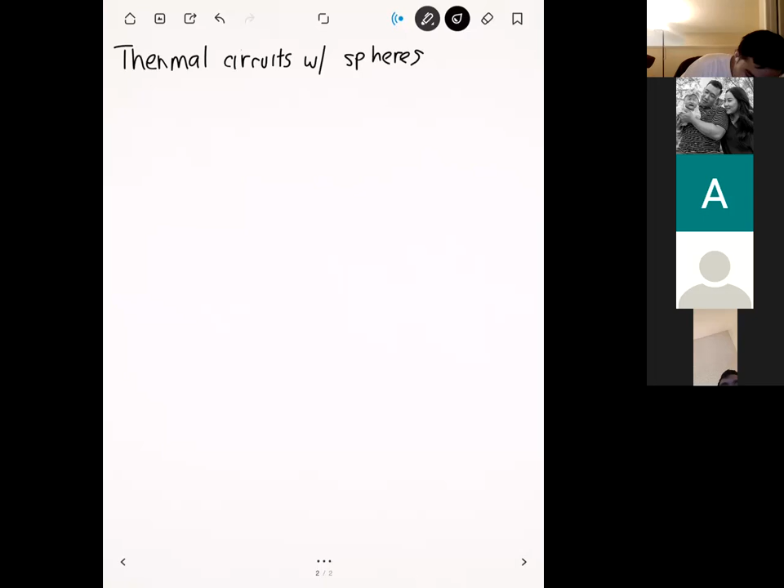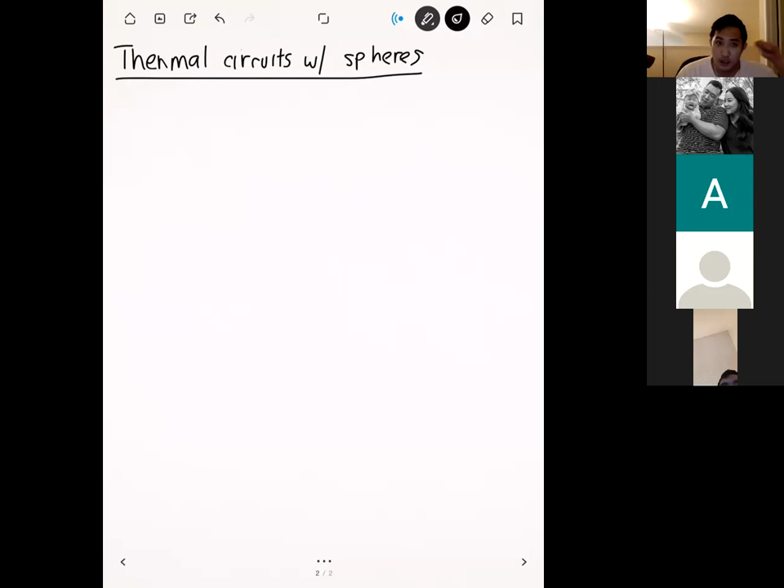All right, so there's one more thing I wanted to cover with spherical heat transfer before we move on, which is thermal circuits with spherical geometries. So I believe last time we derived the expression for the thermal resistance of a sphere, and that was based on one of our solutions to the heat equation. That resistance was given by the following: R sphere is equal to 1 over the inner radius minus 1 over the outer radius, divided by 4 pi k.

And so what you have here is another formula for thermal resistance that you can use in basically exactly the same way. Even though it's a spherical geometry, you can set up the thermal circuit just like you did in Cartesian coordinates and just like you did in cylindrical. It's just that now whenever you have conduction, you're going to use this equation here. And so just as an example, let's do a 3-layered sphere.

So let's say that we have a sphere that looks like this, right? And so let's say that all the way up to here, our radius is R1, okay? Up to the second notch, our radius is going to be R2. The third notch is going to have a radius of R3. And the fourth notch is going to have a radius of R4, okay? And then inside these layers, they all have a unique thermal conductivity. Okay.

Right. And so let's say that we have Ka for the first layer, Kb for the second, Kc for the third. Okay. And then on the outside of the sphere, let's say that we have heat transfer due to convection. Right. And so that convective heat transfer is going to have its coefficient H and its temperature T infinity. Okay. One more thing that we need before we draw the circuit is we need to know the temperature on this interior surface here. Let's say that we have this temperature. We'll give it a value of Ti. Okay.

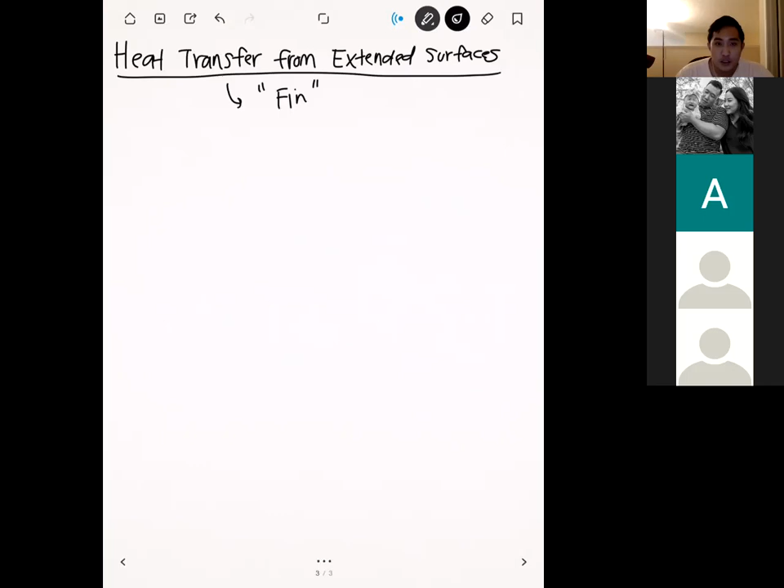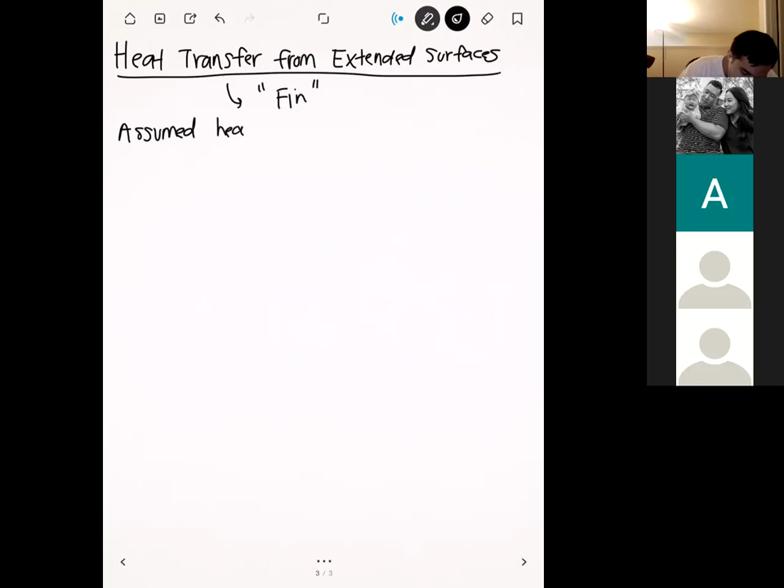The reason for that is up to this point, we've assumed that the heat transfer was purely one-dimensional. This was an extremely important assumption because it allowed us to really simplify the heat equation. As an example, we've looked at cases like heat transfer through a layered wall, and maybe we have convection on the outside here. And so the heat transfer we assumed is all in this direction.

Even to the fluid right here, we assume that the heat is going to leave the surface and go out to the fluid in that direction. So everything is in just one direction. With extended surfaces, we're going to have something different. We're actually going to be in a pseudo 2D case. It's not going to be general 2D heat conduction, but we are going to have heat transfer in different directions here. So what we have now is something like this.

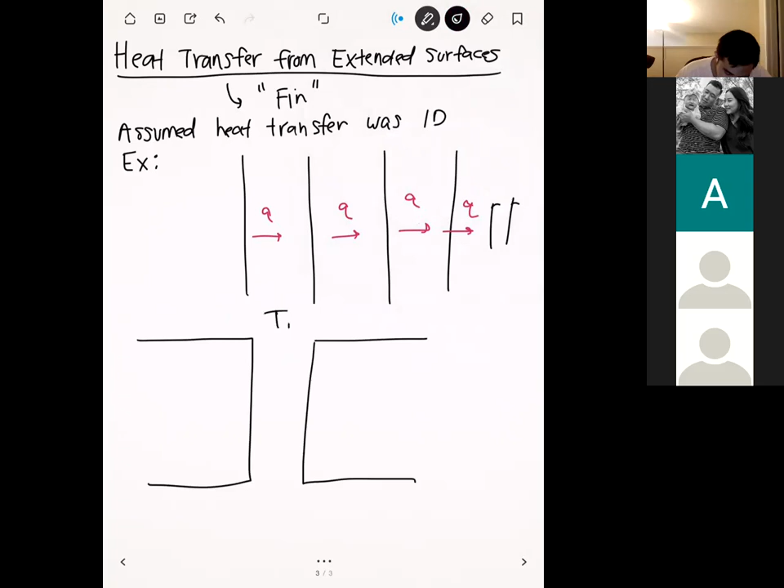Let's say that we have an object like this, and our top surface here is held at T1 and our bottom surface is held at T2. If T1 is greater than T2, we know that we're going to have conduction heat transfer going this way. Heat is just naturally going to flow from high temperature to low temperature.

But the wrinkle that we're going to throw in here is that now the convection is going to be blowing across this surface, so we're going to have heat transfer by convection like that. If you look at how heat is going to leave this solid to the fluid, it's going to look something like this: because the fluid is touching the surface on its lateral side instead of at the end, our heat transfer due to convection is going to go left and right. And that's different than when the heat transfer is going down the length.

So now what we have here is a pseudo 2D situation where our convection is going one direction, but our conduction is going the other direction. The methods that we've developed up to this point won't apply here because we can't assume that all of it's in the same direction. So we're going to need a different equation, what's called the fin heat transfer equation, and then we'll discuss how to solve that. Any questions on this?

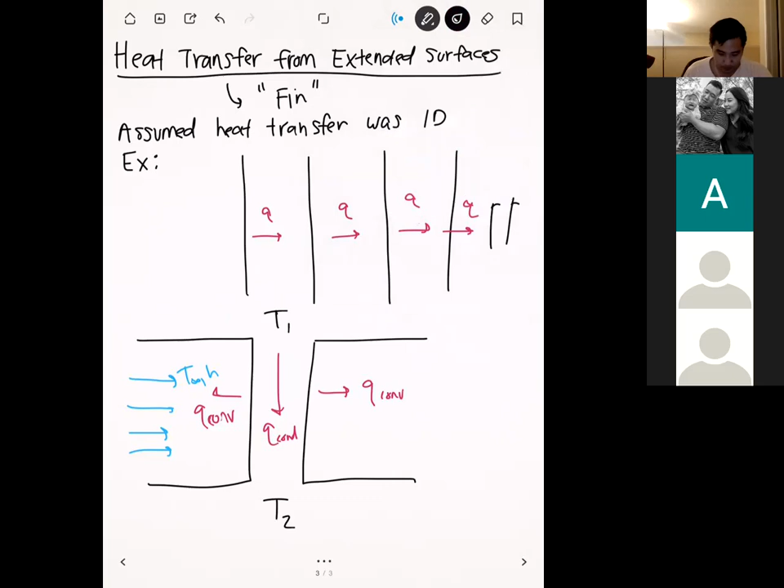Okay. All right. So before we do that, let's talk about just the general purpose of fins to begin with. And so usually, if you're designing your engineering device, the reason why you would want to add fins to a surface is you want to enhance heat transfer. Okay.

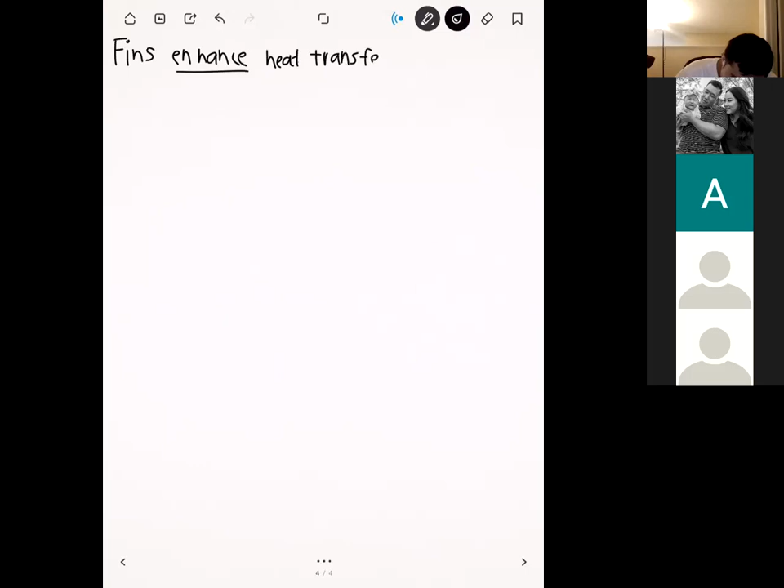Because in most of these situations, you're going to have some kind of fluid. A lot of times it's air, right? So you just have air blowing over your device. And if you want to enhance heat transfer from your engineering device to the fluid, then you want to add some fins, okay? And the primary way that fins enhance heat transfer is that they simply increase the amount of surface area that is on your object, right?

All right, question in the chat, like the World War I Lewis machine gun. Yeah, actually, I think a lot of those early gun designs needed fins just because those things heated up like crazy. And so just to prevent them from burning the operator's hands or melting themselves, they had to put fins on them so that they could expel their heat a lot more efficiently. Okay.

Because in general, the more surface area that you have, the more places that convection can take place. Okay, and so just as a very simple example, let's consider a surface like this, and we have fluid that's blowing past it. Since we have fluid flowing past the surface, we're going to have convection heat transfer, and so heat's going to come out here to the fluid. And so that's fine. But then what if we have a surface that looks like this? Okay.

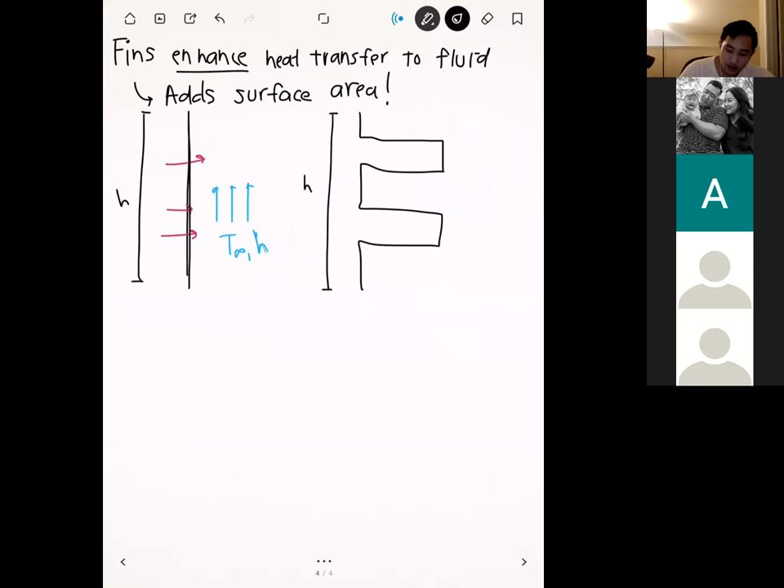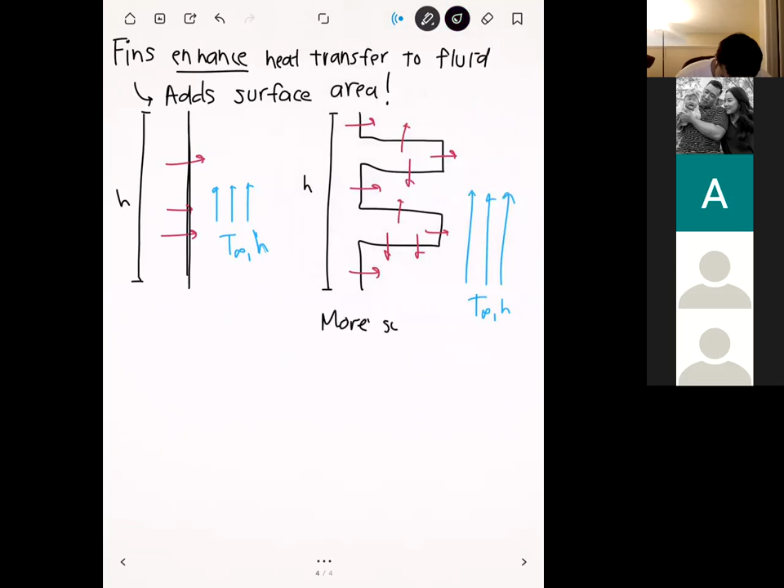Right. And so in terms of height, you can see that these occupy the same kind of vertical space, right? But the case on the right just has a lot more surface area. And so when you blow fluid past this, whether it be air or water or whatever, you're naturally going to have a lot more convective heat loss because you have much more surface area. So there's basically many more places for heat to escape the system due to convection. Okay.

And so this concept is actually used a lot. You'll see fins in a lot of computers too. In computers, you'll see these structures that just seem to come out. Usually they're made of metal, and they don't plug into anything. But what they're used for is to increase the surface area of whatever computer hardware or computer chip you're on, and that increased surface area will help cool it much more efficiently.

So you'll see fins that are used in engines as well, particularly on motorcycles. Fins are used to cool motorcycles pretty efficiently. Also in any kind of air conditioning or heaters as well, yeah.

Question. So I'm guessing there's a sweet spot for the distance between the fins. Yeah, so we'll talk about that. Probably not today, but probably next Wednesday we'll get to that. We'll talk about fin performance and different ways that you can optimize that. Yeah.

Okay. And so if you end up working in any kind of thermal engineering, odds are you're going to be working with fins to some degree. Because they're relatively very simple, but they're also very effective. So if you know how to analyze fins and how to design them, that's a big part of the thermal engineering for a lot of different devices.

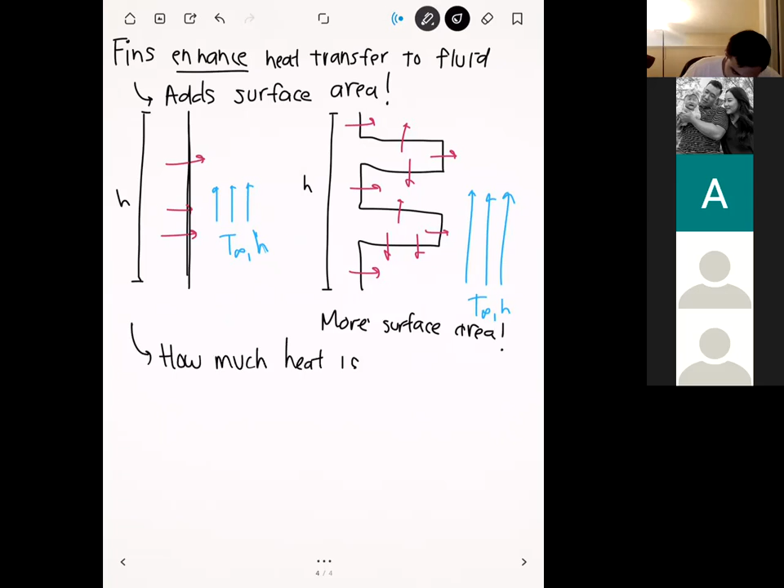Okay, and so what are we particularly interested in as engineers? What we're interested in is computing how much heat is transferred from a fin. Because if you can compute how much heat is lost from a fin, then you can learn how to design them and make them a big part of your engineering design. Okay. And so in order to compute the heat transfer, just like for everything up to this point, we're going to need to know the temperature distribution in the fin. Okay.

Because if we can solve for the temperature distribution, computing heat transfer is just a matter of either doing Fourier's law or Newton's law of cooling. Okay. And so what we're going to do next is look at the fin heat transfer equation and then look at the different terms. We're not going to derive it, because I think that would take a bit too long, but we can at least look at the equation and talk about each of the different terms in there. So before we do that, are there any questions on this?

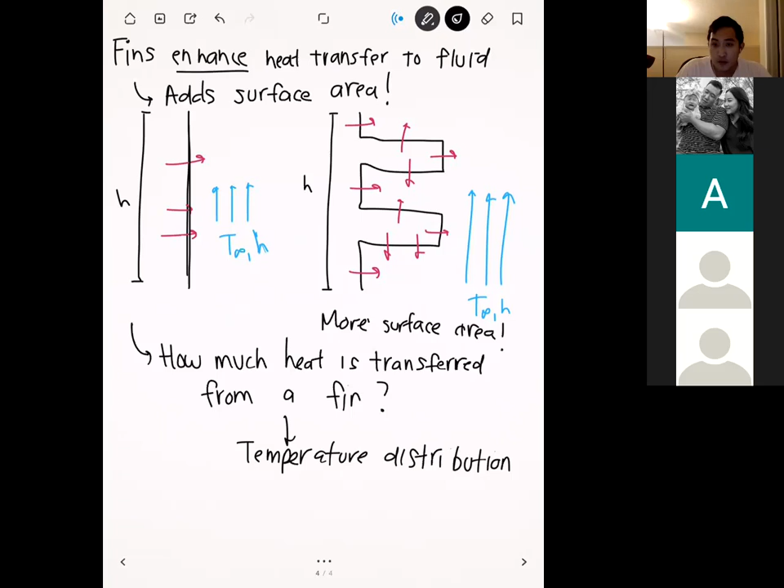Okay. So let's look at the fin heat transfer equation. I'm going to write out the full equation right now, but we'll simplify this significantly as we apply some assumptions. The first thing we have is d²T/dx². That should look familiar. That's a remnant of our regular heat equation, right? If you remember from our regular heat equation, we had the second derivative of T with respect to x.

The next thing that we have is this term: 1 over Ac times dAc/dx times dT/dx. And so Ac in this case is our cross-sectional area for the fin.

My phone's ringing. Someone's about to tell me my social security number has expired for the 11 millionth time. Okay.

And so that's the second term. And we have one more term here, which has to do with the outer surface area. So it looks something like this. And all that's going to be equal to 0. So we've introduced another new variable here, which is As. As here is going to be the outer surface area of the fin.

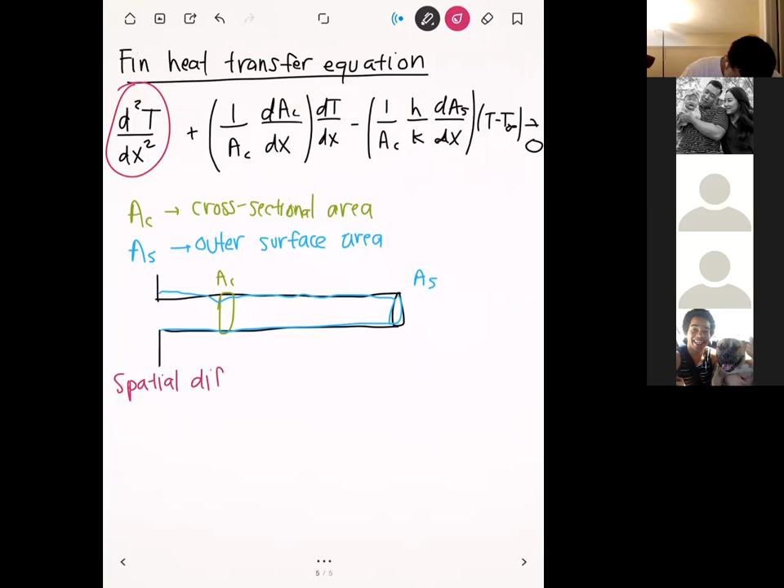Our fin is made of a solid material, and so because of that, we're going to have heat transfer through conduction all the way through the fin, and that's what that first term represents. It looks exactly the same as the term that we've had previously, because it represents the same thing: heat transfer through conduction through the solid part of the fin.

Now let's look at the second term right here. What the second term represents is a change in heat transfer in case the cross-sectional area of the fin changes.

The key term in this second term is dAc/dx. What that term mathematically represents is if the cross-sectional area is changing as we move along the fin. Say that you have a fin that tapers, that might look like this. In that case, the cross-sectional area is changing with respect to x, and this term accounts for that.

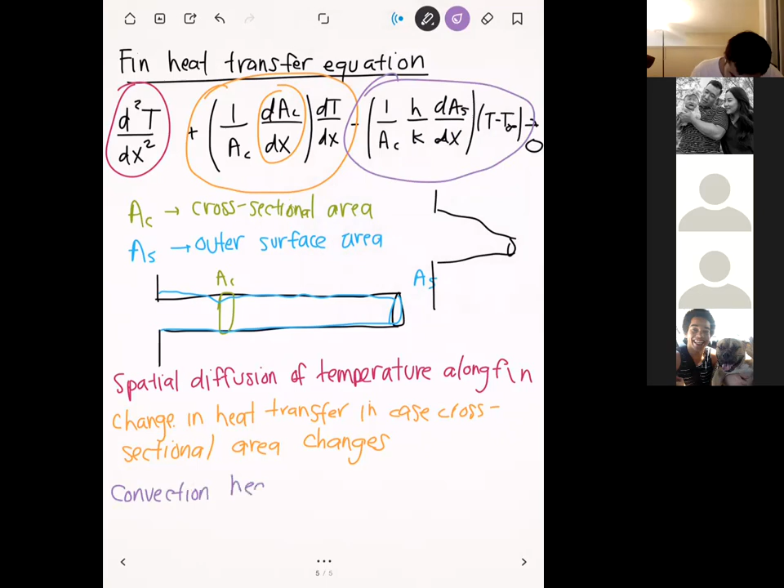Okay. And so, because this fin is a very slender object, our convection heat transfer is going to take place on the outside. Okay. And that's what that term represents. And so this one equation right here kind of accounts for those three modes of heat transfer.

So we have regular conduction through the fin. We have a correction factor in case the area is changing. And then we have a term that deals with the convection heat transfer off the lateral side. Okay. Any questions on this so far?

Okay. So let's go ahead and start applying some assumptions here to simplify this guy. The first assumption that we're going to make, which is fairly common, or it's not that bad of an assumption: we're going to assume that the cross-sectional area does not change. Okay. And so we're going to be dealing with a fin that looks exactly like the one I have pictured here. So it's basically the same cross-sectional area all throughout, right?

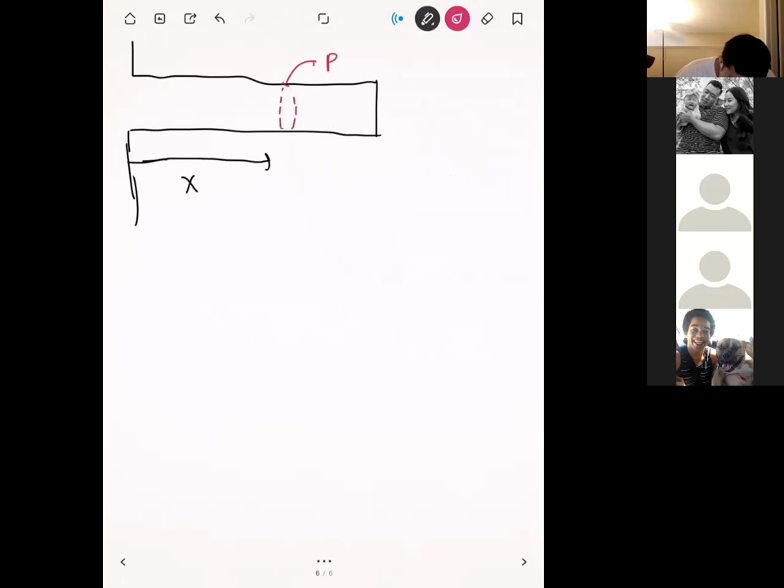And let's assume for a second that we're considering a length of the fin denoted by x. And so we can say that the distance from the base of the fin over to this section of the fin right here is x. One other thing that we're going to know here is the perimeter of the fin. Because if the cross-sectional area is constant, then the perimeter will also be constant as well. Okay.

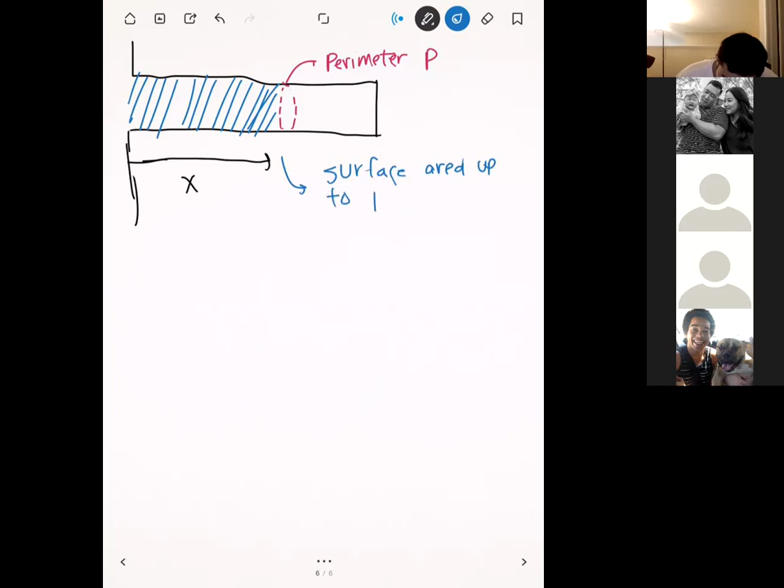And so let me do this. So up to this point x right here, let me go highlight the surface area that we've covered so far. And so if we only consider the section of fin that we've covered up to a distance x, we can compute the surface area up to that point. And so we're not considering the whole fin here. We're just considering the section between the base of the fin over to the location x.

We can then compute the surface area from this. It's just going to be simply the perimeter of the fin multiplied by whatever distance x. Right? So this is the part that's a little bit strange, because we have to think about how the surface area of the fin varies from different x locations on the fin. You can almost think of this function as the surface area that we've swept out as we travel from the base to the end of the fin. So if we're a distance of x from the base, we've swept out a surface area of p times x. Are there any questions on that?

What if you have like a hollow tube? Yeah, so if you have a hollow tube, that's going to affect mostly your cross-sectional area. If you have a hollow tube, then you're not going to have any convection heat transfer in the middle. You're still going to have convection heat transfer off the outside. It's just going to affect the cross-sectional area for how much conduction is going to go down that way.

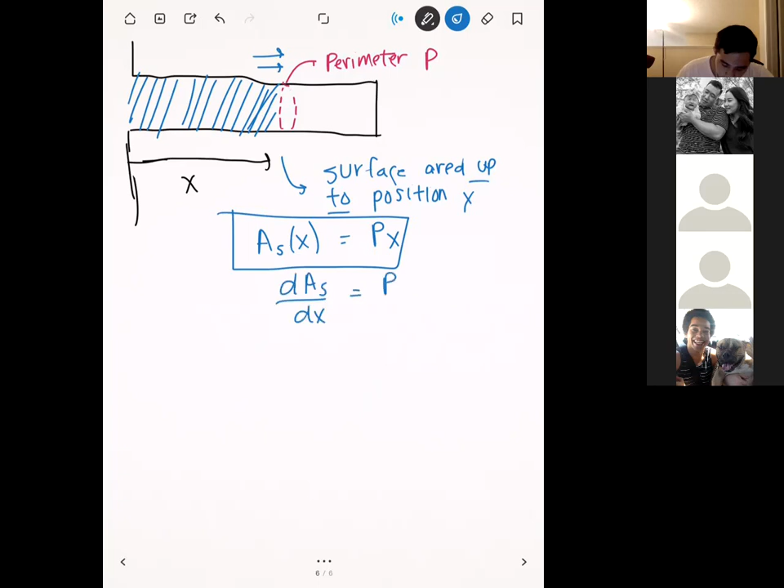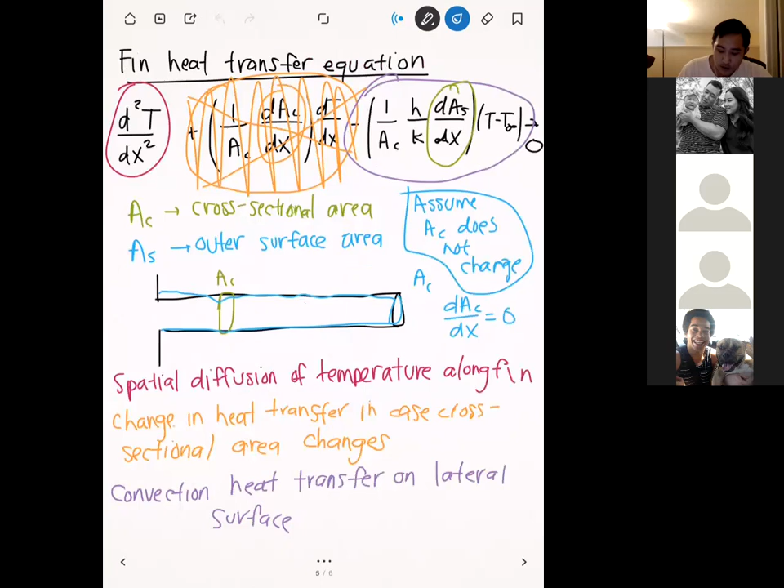And so dAs/dx is just going to be P, our perimeter. Right? And this is something that we can plug into our fin equation. Our fin equation, you can see that I've circled in green right here, we have dAs/dx. And so for the case when we have a constant cross-sectional area, then dAs/dx is also going to be a constant, which is just P.

Okay. And so if we put all these together, we can get a much more simplified version of the fin heat equation. We have our first term, which is d²T/dx². So that's fine. Then we have h times P. And so h, remember, is our convection heat transfer coefficient on the outside. P is the perimeter that we just talked about right here.

Then we have k, where k is the thermal conductivity of the fin material itself, times the cross-sectional area. Then we have the difference between the temperature of the fin and the surrounding fluid, and all that's going to be equal to 0. And so you can see here we have a much simpler equation to work with.

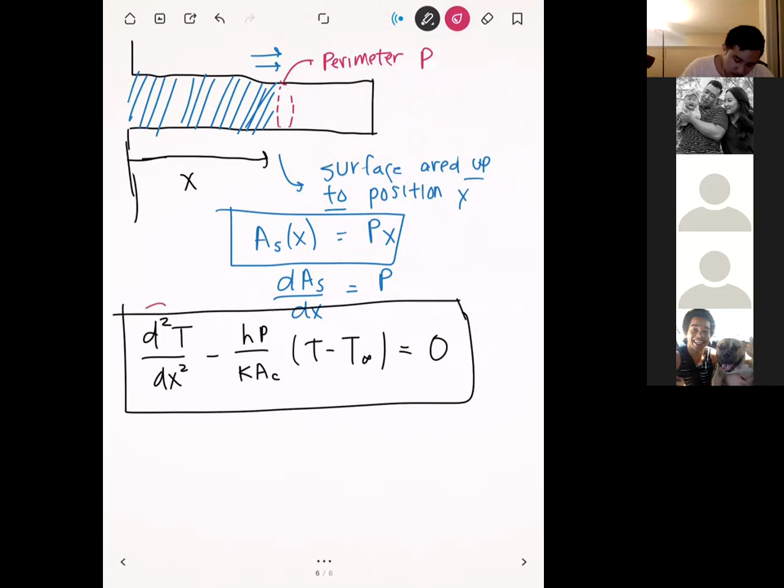Just to remind you what each of these terms represent, this first term right here is conduction heat transfer down the length of the fin. And then the second term right here is convection heat transfer off the outer surface of the fin.

Okay. And the nice thing about this equation is that these parameters here, which I'm going to circle in orange, are all constants. And so what we simply have here is a second order differential equation. It's a bit more complicated than our usual heat equation, but this is something that we can solve.

But there's actually one more thing that we can do to make this a little bit simpler, because right now this is what's known as a non-homogeneous differential equation. In other words, we have a term out here, this T infinity times hP over kAc, that's going to make solving this more difficult than it has to be. And so what's typically done for fins is we make a change of variables to simplify this a little bit more.

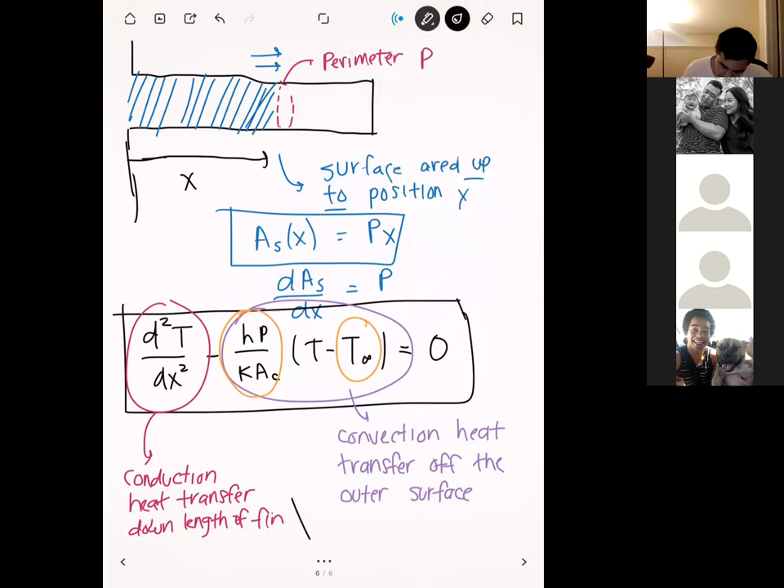It sounds scary, but it's one of the simplest changes of variables possible in science. So it's actually going to make our lives a lot easier once we do this. So before I do that, are there any questions on this page here?

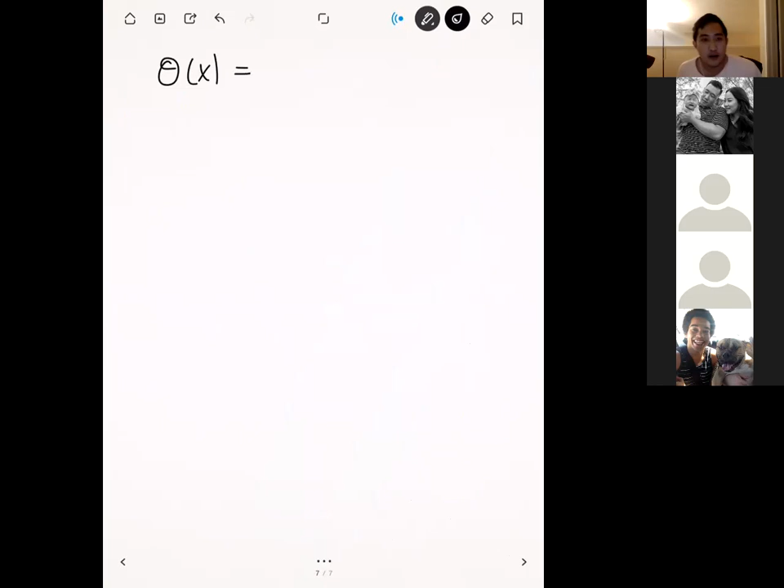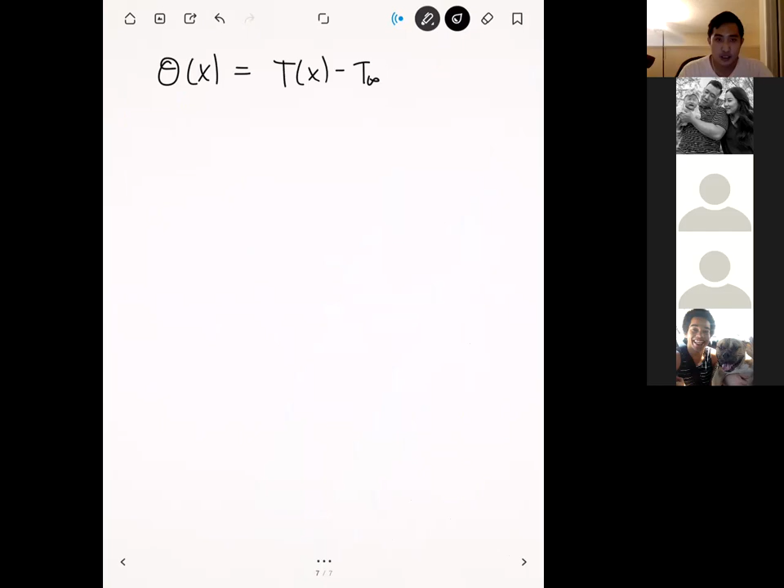Okay. So let's go ahead and define our change of variables. We're going to define a new variable called theta, and we're going to define theta like this. Theta is just going to be the difference T(x) minus T infinity, where T(x) is the temperature in the fin at a position x.

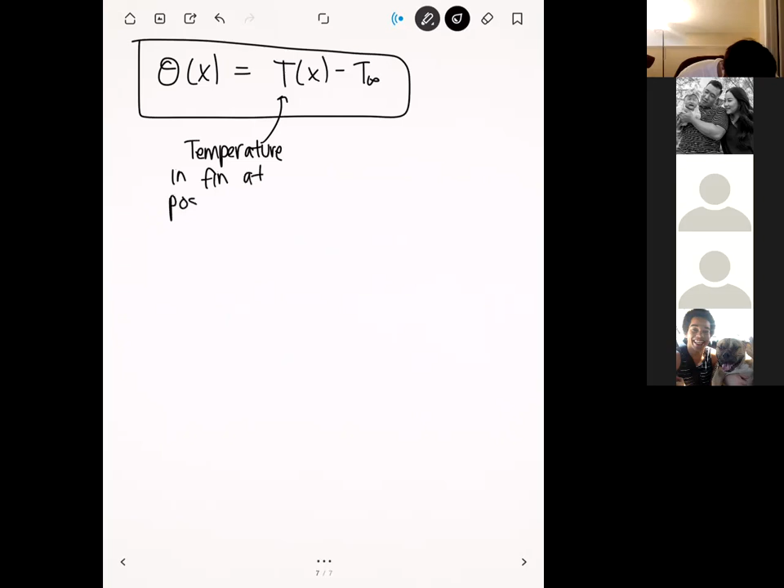And T infinity, this is the temperature of the fluid. And so the way that we've defined theta here, theta is what's known as the excess temperature.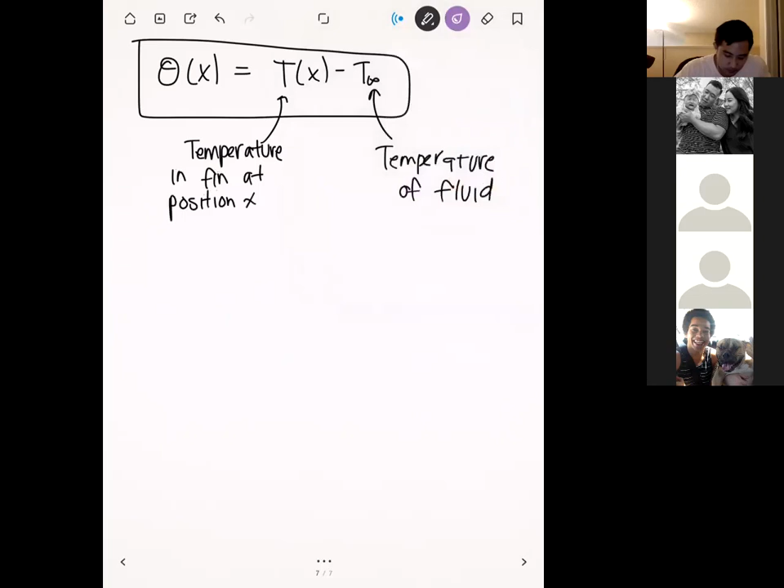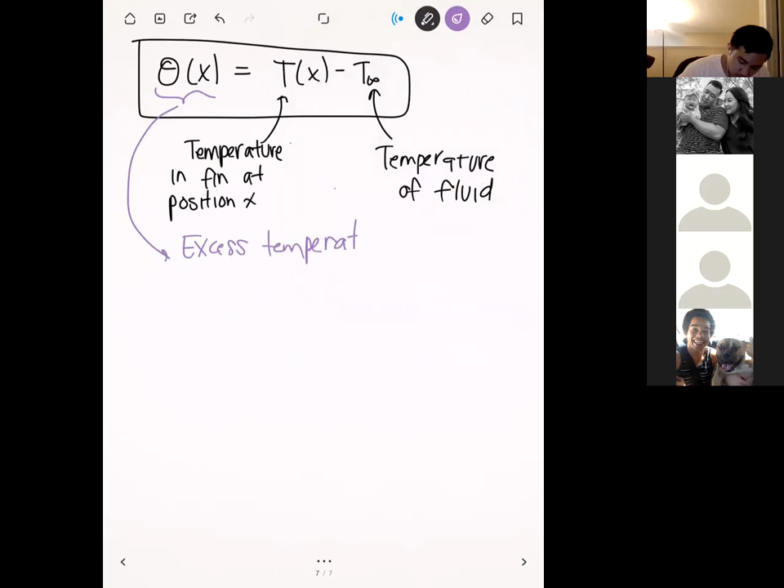And so the excess temperature is basically defined as how much hotter our fin is than the surrounding fluid. If you take the difference between the temperature of the fin versus the temperature of the fluid, then you get the excess. So that's whatever the fin is in excess of the fluid.

And so this will help us simplify our equation, because now what we have to do is take derivatives of this. Let's say that we take two derivatives, d²θ/dx². We take the derivative of the above expression twice, and for the first term, we get d²T/dx². And when we take the derivative of T infinity twice, we just get 0, because we're taking the derivative of a constant.

And so what this will allow us to do is come up with an even simpler version of the fin equation, because that'll eliminate this non-homogeneous term on the right here. And so then we'll just have d²θ/dx² minus hP over kAc times theta. And this is a much easier equation that we can solve.

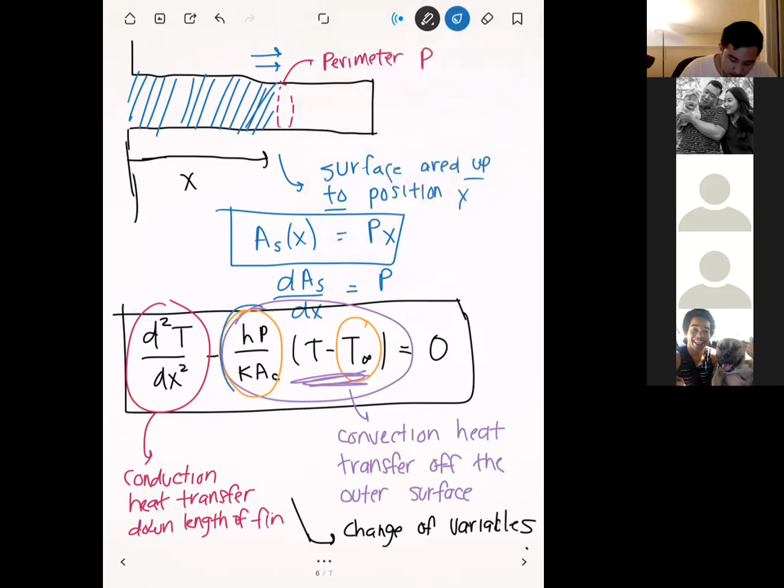But before I move on to that equation, I want to talk about this set of parameters right here. So let's go look at that on the next page.

Okay. And in particular, I want to look at the terms on the top of this expression versus the terms on the bottom of the expression. Okay. All right. And so on the top right here, we have h, where remember, h is our convection heat transfer coefficient, multiplied by P. Okay. And so these are all parameters that have to do with only convection heat transfer.

Okay. Because if you increase h, or you increase how effective the convection is, you're obviously going to increase the amount of convection heat transfer that comes out. But also, if you increase the perimeter of your fin, that's also going to increase the amount of convection because that increases the surface area, right? And so on the numerator of this parameter here, we have variables that only affect convection.

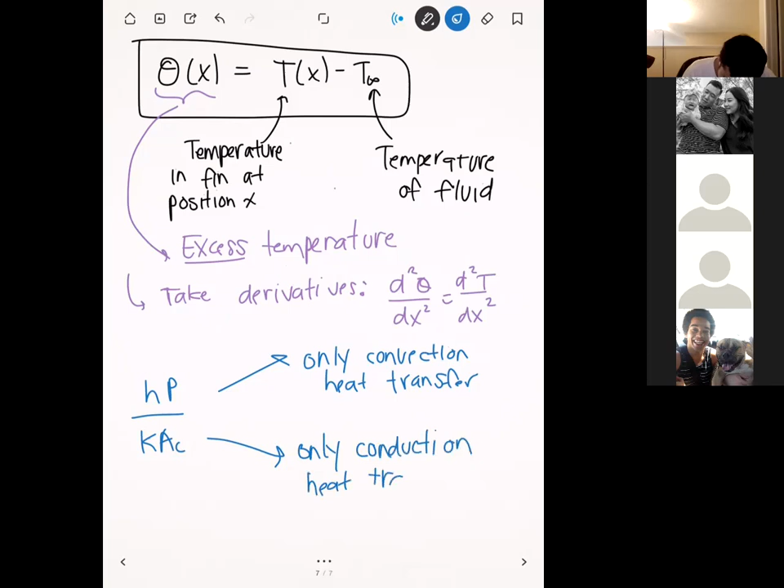And so if you compare that to the denominator, on the denominator here, we have thermal conductivity multiplied by the cross-sectional area, okay? And so these are expressions that only affect conduction heat transfer. Because if you increase the thermal conductivity of the fin, that will increase the amount of conduction that goes down the length of the fin. Likewise, if you increase the cross-sectional area, that increases the amount of conduction as well.

And so basically what you have here is a ratio of the strength of convection of the fin over the strength of the conduction of the fin. So you have convection over conduction. And since this is a ratio, we often give it a special symbol to simplify our work. So for the purposes of this analysis, we're going to replace this quantity hP over kAc with a new variable called m squared, okay?

So I know it's a lot of variable replacements here, but in the end, it's going to simplify our equations. And once we actually start to solve it, you'll see why we do all this, because even with all these simplifications, the math is still going to be pretty intense. Okay. And so I know I'm changing the names of the variables around quite a bit, but that's why I wanted to take some time and define what each of these mean.

Okay. So, just to summarize this section, the first thing we're going to do is substitute theta in for T, where theta is the excess temperature, or how much hotter our fin is than our fluid. And then we're going to make another substitution for m squared, where m squared represents the relative strength of how strong convection is over how strong the conduction is in the fin. From this point on, I'm just going to use theta and m, so I want you guys to remember what they physically represent. Okay. All right. Any questions on this?

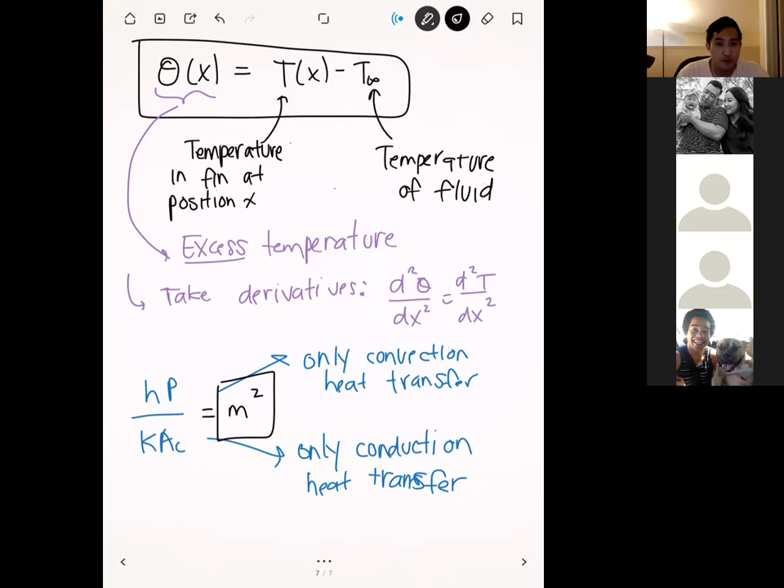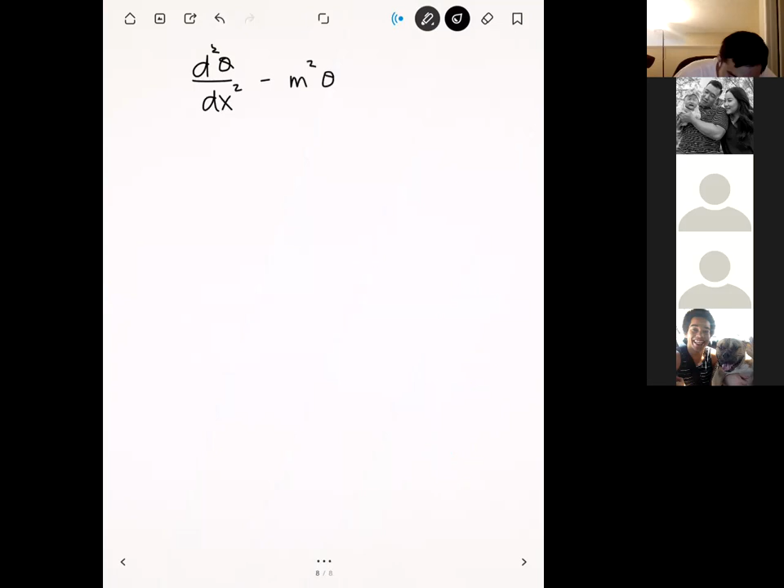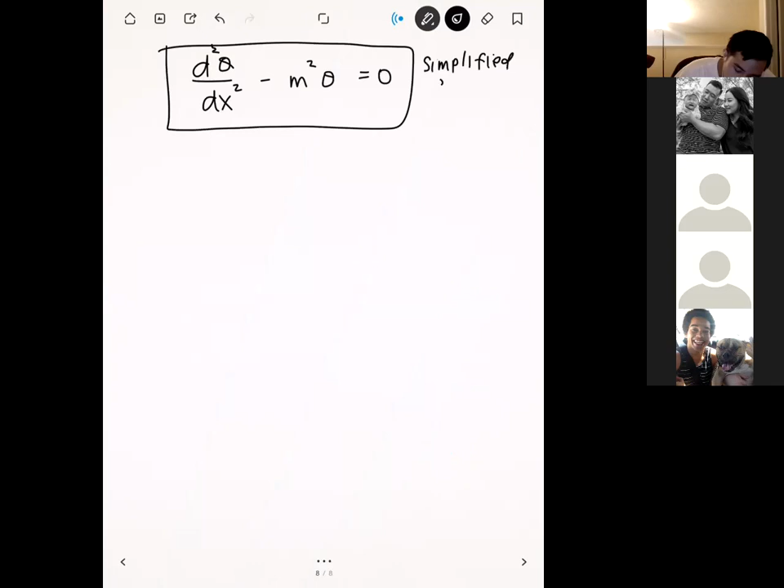Okay. All right. And so if we make those substitutions, then our fin heat equation takes probably the simplest form ever, right? It's just going to be d squared theta dx squared minus m squared theta is equal to 0. Okay. And so this is our simplified fin heat equation. And so now what we have here is a homogeneous second order ODE that we can solve much more easily.

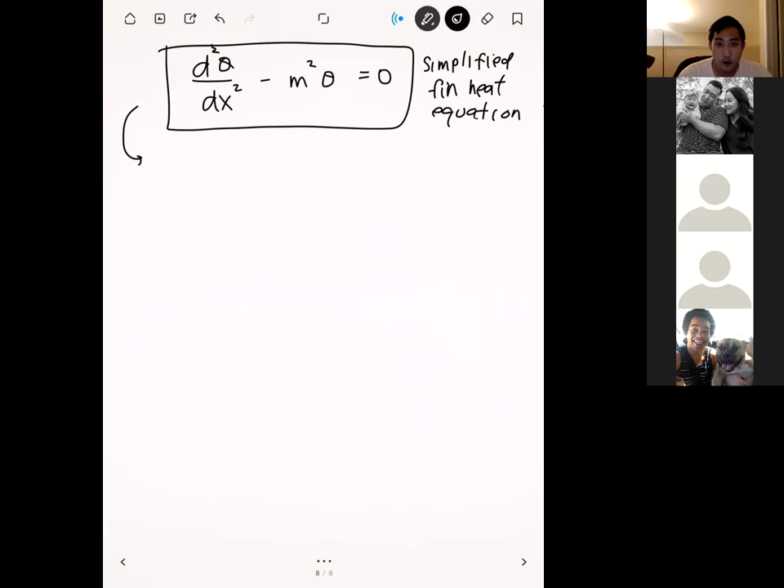All right. And so if you recall from 308, the way that we can solve this kind of equation is to use the characteristic equation. If we use the characteristic equation, we're going to replace the second order derivative with a quadratic term. So instead of d squared theta dx squared, we're going to have lambda squared minus m squared, and this is going to be equal to 0. And so if we solve for lambda, what we get is lambda is equal to plus or minus m. And so with that, we can form our general solution.

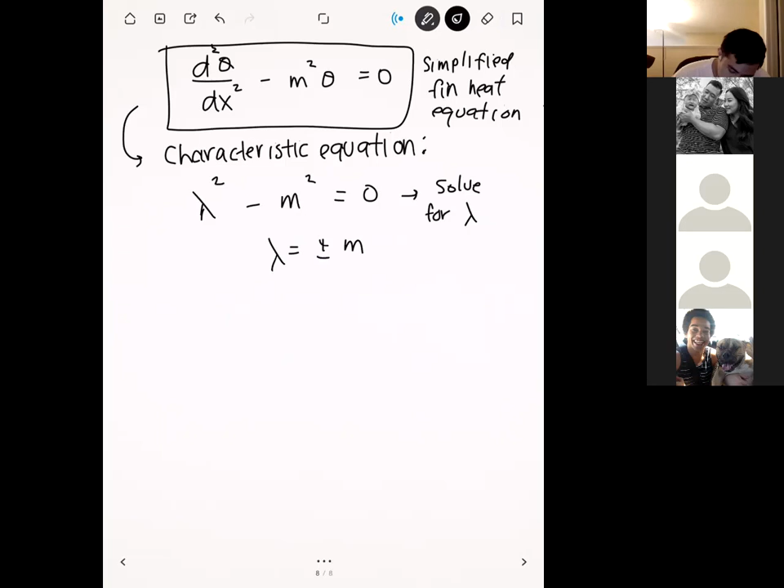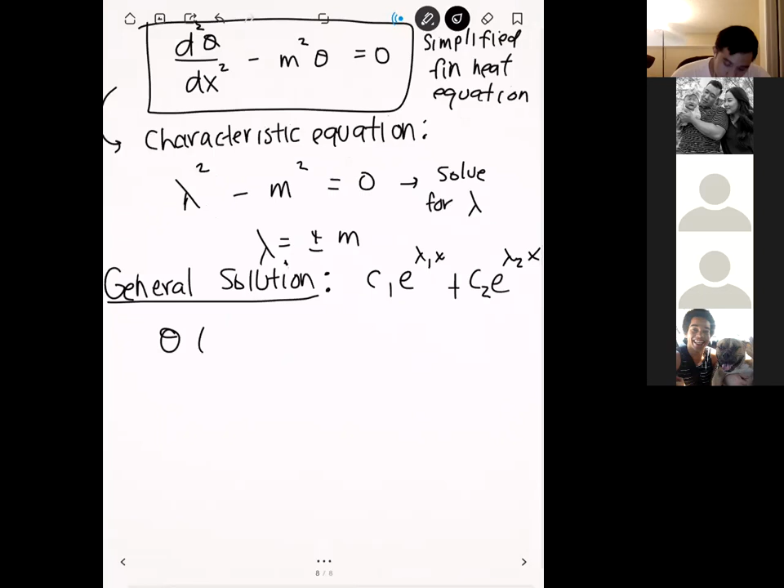Okay. And so our general solution looks like this, right? We're going to have C1 times the exponent of lambda 1 x plus C2 times the exponent of lambda 2 x. And since our lambdas are going to be plus or minus m, we're going to go ahead and plug that in. And so our solution is going to be theta of x is equal to C1 times e to the mx plus C2 e to the minus mx.

Okay. All right. And so a deceptively simple solution, but it's going to get a lot more complicated once we start applying boundary conditions. But before we do that, are there any questions on this so far? Okay. And so now that we have the general solution here, just like we've done with the heat equation, we're going to need to apply boundary conditions to solve for C1 and C2.

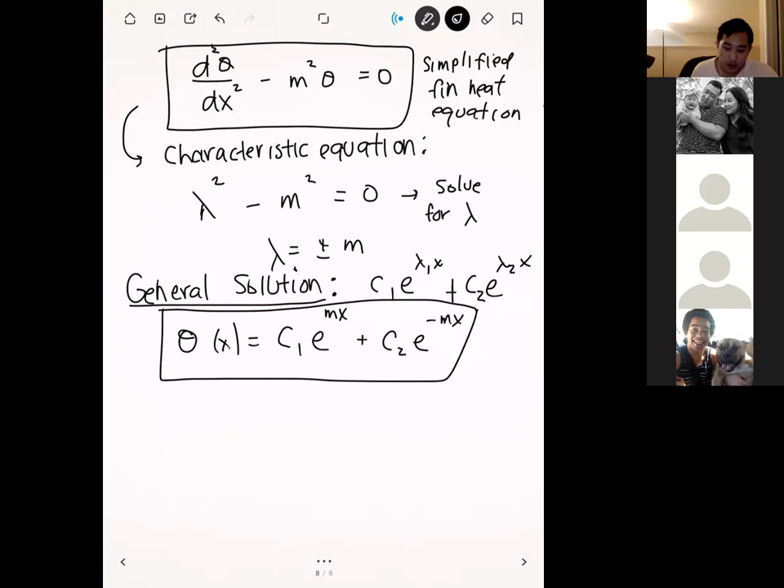All right. And so the boundary conditions that we're going to apply are going to take place at the two extremes of the fin. If we have a fin that looks like this, we're going to apply one boundary condition here and one boundary condition here. The boundary condition on the left, where the fin attaches to our engineering device, is going to be known as our base condition, because that's the boundary condition at the base of our fin. And on the other side of the fin, we're going to apply a boundary condition on the tip. This is known as the tip condition.

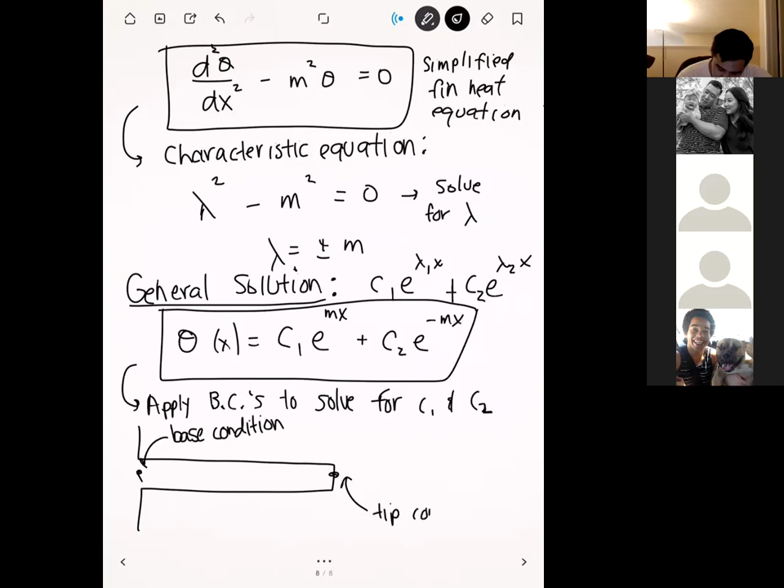And so is that a P at the base? Wait, say again, a P? Oh no, it's just a dot. There you go. Yep. Oh, okay. Yeah, my stylus likes to kind of drag down a little bit.

Okay. So for the base condition, there's only one option, which is nice, because there's only one thing that we can apply there. What we are basically going to assume is that we know the excess temperature at the base. So at the base we have theta of 0 is equal to theta b. We're assuming that we know how hot our device is at the base, so we can compute the difference between our device temperature versus the surrounding temperature.

Okay. If you remember, theta represents our excess temperature. So theta b is nothing more than TB, the temperature at the base, minus T infinity. This is pretty reasonable most of the time, because most of the time you're building a fin so that you can cool a surface, and if you want to cool a surface, you already know how hot it's going to be. So that's the base condition, and that's the only one we need to apply there.

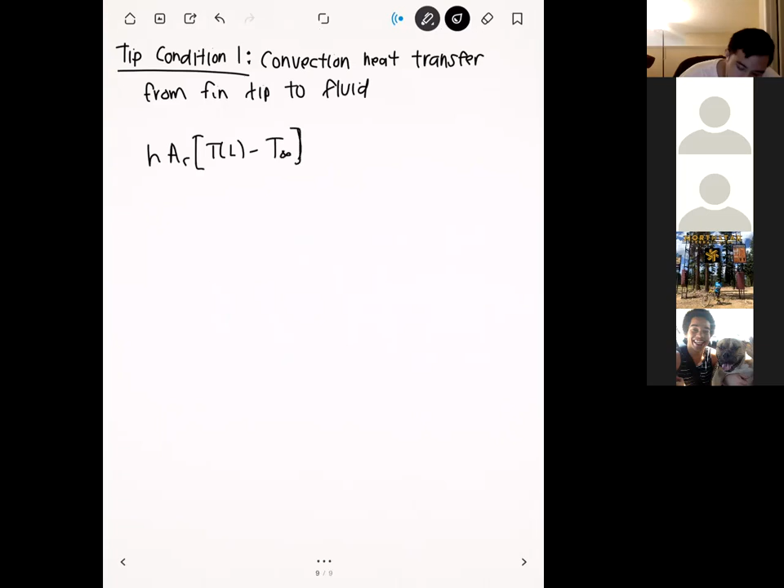This is going to be equal to minus K times AC times dT/dx at x equal to L. Just like we've always seen with our convection boundary conditions, we have a balance of heat transfer due to convection on the left-hand side, and on the right-hand side, heat transfer due to conduction, which is Fourier's law. Notice, in this convection heat transfer equation, we have AC right here. Remember, AC is the cross-sectional area.

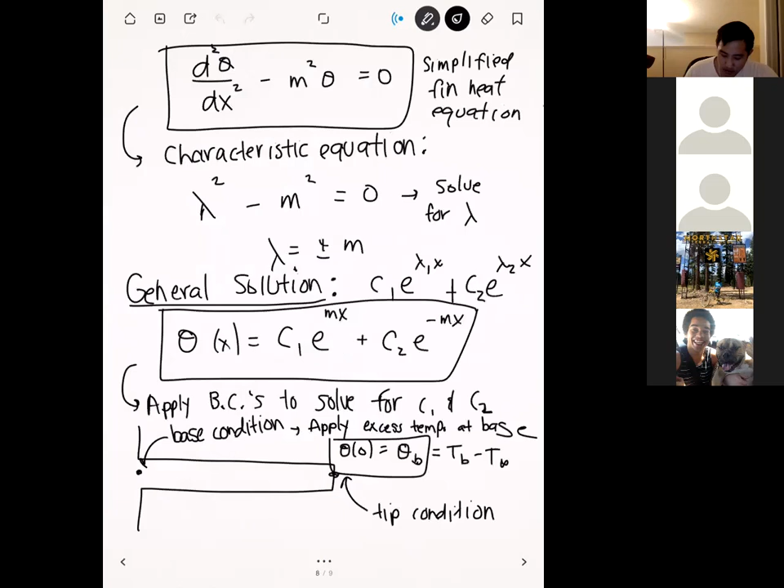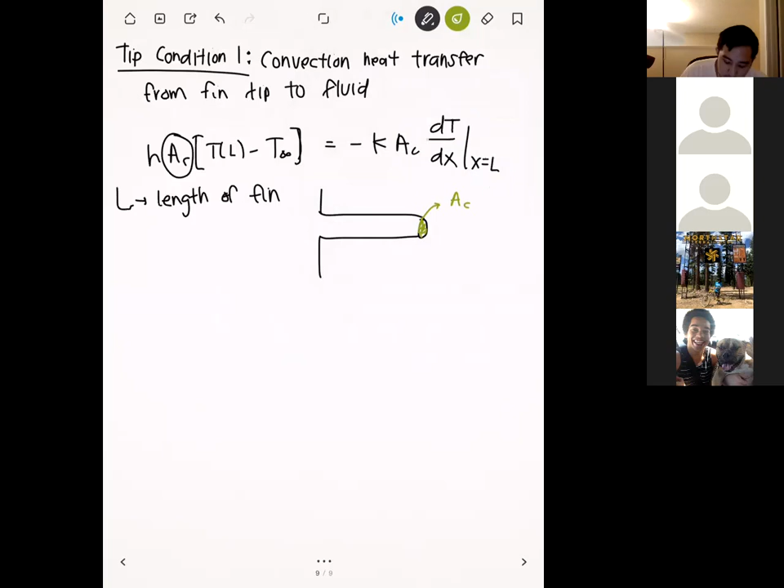So basically what we're saying here is that at the tip of the fin, if we just consider this area right here, which I'm going to highlight in green, the area of this tip is AC, because that's going to be our cross-sectional area. And so what we're assuming with this boundary condition is that at this tip, we're going to have convection heat transfer.

Okay, so let's go ahead and simplify this equation. First of all, we see that we have Ac on both sides, so we can go ahead and cancel those out. One thing we can also do is replace this T of L minus T infinity with theta. Because remember, that's exactly what theta is. Theta represents the difference in temperature between the fin and the fluid.

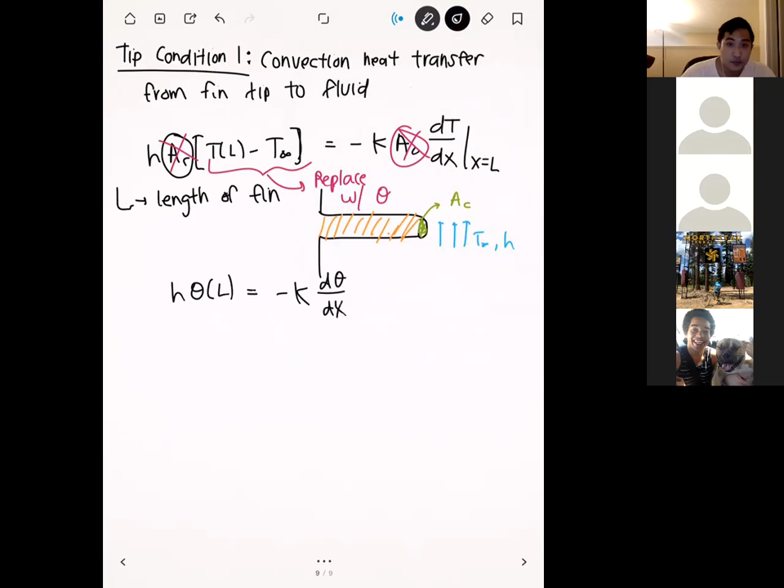And so the simplified form for this equation is going to be h times theta of L is equal to minus k d theta dx at x is equal to L. And so this combined with our other boundary condition gives us two conditions through which we can solve for C1 and C2.

Professor, I had a quick question. Yeah, what's up? That theta of L term, is that the function representing theta at a certain length, or is that just multiplied times the length? Yeah, it's the first one. It's our theta function evaluated at x is equal to L. Okay, thank you.

Right. So I'm about to warn you guys that this math is going to get a little bit intense, because we're going to deal with a lot of exponentials here, probably more exponentials than you ever want to see in your lifetime. But this tip condition is the most difficult one, so it leads to the most intense math. If you understand this one, the other ones by comparison are a lot simpler. So let's start working through the math of this condition.

Let me actually write out our base condition here. Our base condition says that theta of 0 is equal to theta b. If we plug x equal to 0 into our general solution, we simply get C1 plus C2. So very innocent looking so far, right? From this equation we can solve for one of these constants in terms of the other. If we solve for C1, we get C1 is equal to theta b minus C2.

That term in the square brackets is just our general solution for theta evaluated at x is equal to L. On the right-hand side, we're going to have the derivative of that. If we take the derivative of this general solution, an m is going to come out in front. So we have k times m times C2 e to the minus mL minus C1 e to the mL.

So there's a few negatives that happened right there. We had this first negative that distributes through. And we also had another negative that came out by taking the derivative of this negative exponential term. So the C2 term ends up positive because two negatives cancel out, and our C1 term ends up negative because we just have the one negative from the boundary condition. And so now, in this monstrosity of an equation, we're going to plug in for C1.

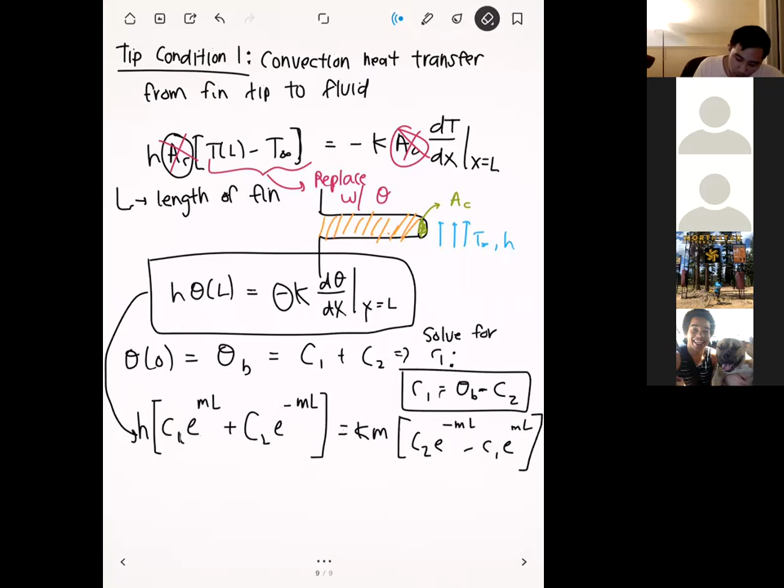Okay. And so wherever we see a C1, we're going to plug in this expression right here. So we have a C1 right here and a C1 right here. Okay. And so what that will allow us to do is it'll allow us to solve for C2, because we will have eliminated C1 from the equation. And then once we solve for C2, then we can go back and solve for C1. Right? Okay. Any questions on this before I start writing that out?

Okay. All right. And so after we plug in for C1, we end up with this expression. So we have H times theta B minus C2 times e to the ml plus C2 e to the minus ml, okay, is equal to k times m times C2 e to the minus ml minus theta b minus C2 e to the ml. Okay.

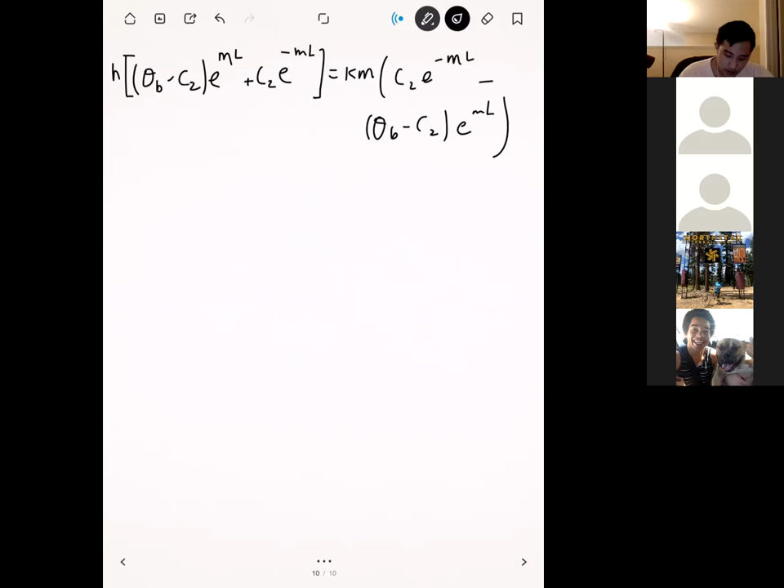All right. And so now we've plugged in for C1. And so now, what you'll notice is that the only unknown in this equation is C2. Right? Everything else is either a known quantity or it's our boundary condition. Right? So theta b, we know what that is. M, we know what that is. H, M, K, we know what all of those guys are. Okay. And so now the goal is to manipulate and solve for C2. Okay.

And so first thing I want to do is, what did I do first? Okay, so first thing I'm going to do is I'm going to distribute basically these guys too, okay? Just so that we have everything like that. And I'm going to move Km over to the other side of the equation. Okay, and so on the left-hand side, we're going to have H over Mk times the quantity theta b times e to the ml plus C2. And then I'm going to group the two C2 terms together. And so our C2 term is going to be e to the minus ml minus e to the ml. Okay. Right. So that's everything on the left-hand side.

And on the right-hand side, I'm once again going to combine the C2 terms. And so we have C2 e to the minus ml plus e to the ml. Okay. And then minus theta b e to the ml. Okay. And so the reason I do this is so that we can put all the C2 terms on one side of the equation, and then we can put all the other terms on the other side. Okay.

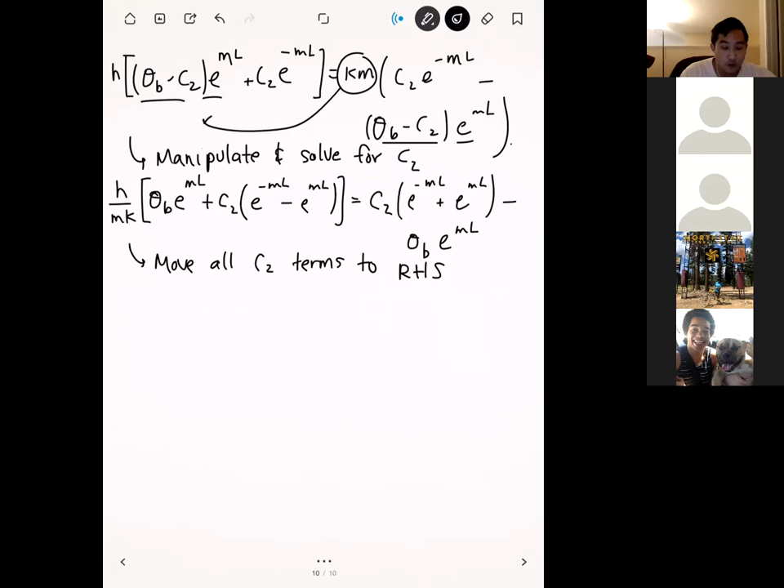And so in fact, I'm going to go ahead and move all the C2 terms to the right and then all the non-C2 terms to the left. Okay. And so I'm going to take this guy right here, C2 e to the minus ml minus e to the ml, and move that to the right-hand side. And then I'm going to take this theta b e to the ml and move it to the left-hand side. Okay.

All right. And then here is the result. And so on the left-hand side, what we have is theta b times e to the ml times h over mk plus 1. Okay. And this is equal to C2 times h over mk. Sorry. Square brackets here. C2 times the quantity of h over mk times e to the ml minus e to the minus ml, plus quantity e to the minus ml plus e to the ml. All right.

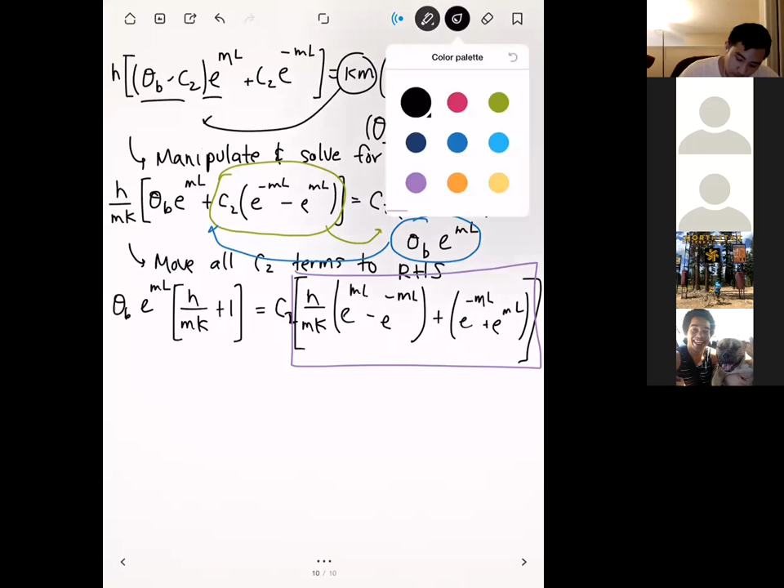Okay. And so if we divide through by that, then we have our final expression for C2. And so our C2 here is going to be theta b times e to the ml times h over mk plus 1. Okay. All divided by h over mk times e to the ml minus e to the minus ml, plus e to the minus ml plus e to the ml. All right.

So it's a little bit intense, I know, and we're not done yet. So we're about halfway done. All right. Any questions on this so far? Probably you guys are still writing stuff down, so I'll give you guys a minute to write this down.

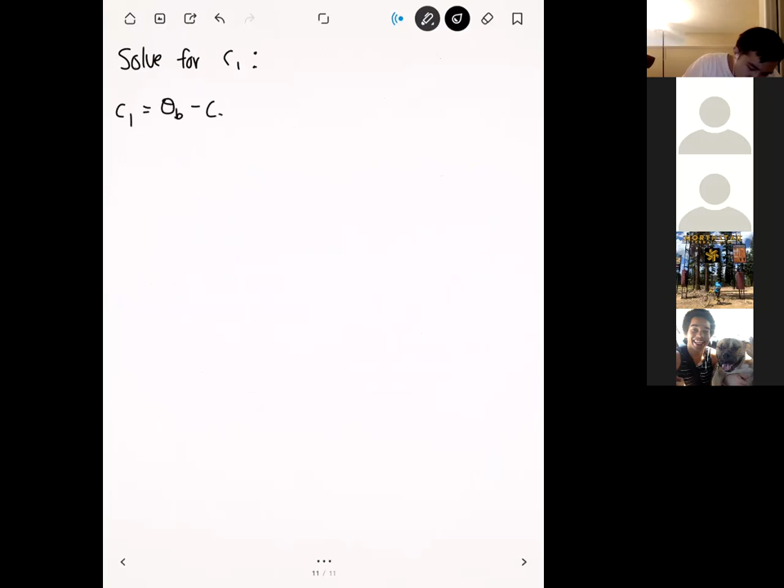And then if we plug in C2, we get theta b minus theta b times e to the mL times h over mk plus 1, divided by h over mk e to the mL minus e to the minus mL plus e to the minus mL plus e to the mL.

All right. And so technically this is C1 right here, but we usually like to put it under one common denominator. And so if we do that, then we get the following. We get C1 is equal to, I'm going to factor out theta b because you can see that both of these terms here have theta b, right? And so we go ahead and pull those out of the equation.

And so we get theta b times h over mk times minus e to the minus mL plus e to the minus mL, all divided by h over mk e to the mL minus e to the minus mL plus e to the minus mL plus e to the mL. So that's C1, okay?

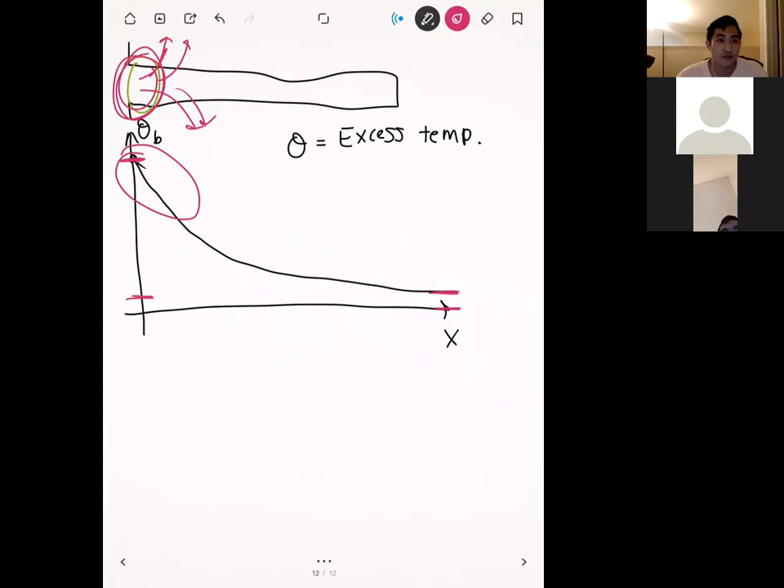Oh yeah, okay. So when you said... actually, I don't even know. There was an h theta L equals negative k and derivative of theta of x. And the next line you wrote, let me see if you have it up right there. I think, yeah, right there. Okay. So at the bottom where it says h, and then inside parentheses it's C1 e^(mL) plus C2 e^(-mL), equals the k m. Where did that m come from? Where the k? Yeah.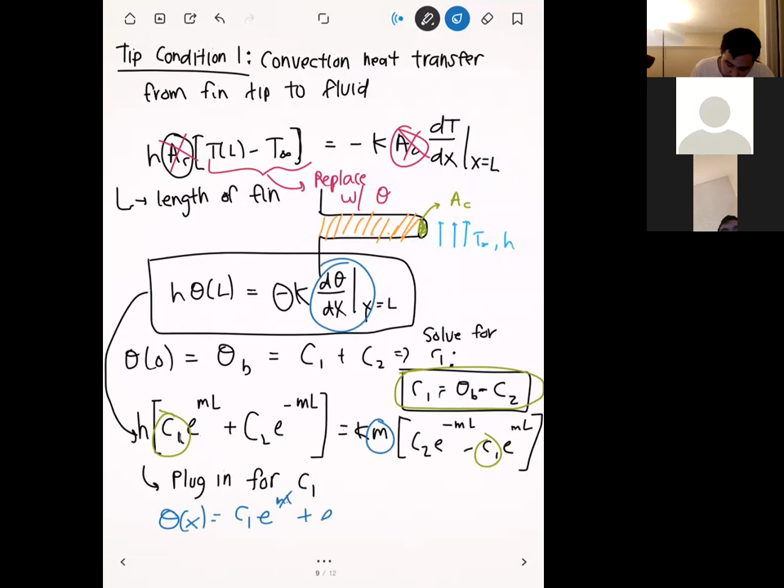Good question. So this m right here comes from the fact that we're taking the derivative. It was a detail that I kind of glossed over a little bit, right? This m comes from the fact that we're taking the derivative of theta. Because remember, our theta of x is equal to C1 e to the mx plus C2 e to the minus mx, right? And so when we take the derivative of C1 e to the mx, that m kind of pops out in front, right?

Got you. Okay, that makes sense. Okay, thank you very much. Yep. Have a good one. Yeah, you too.